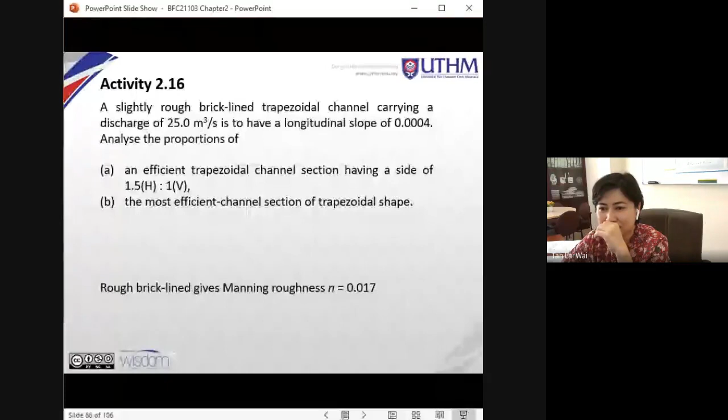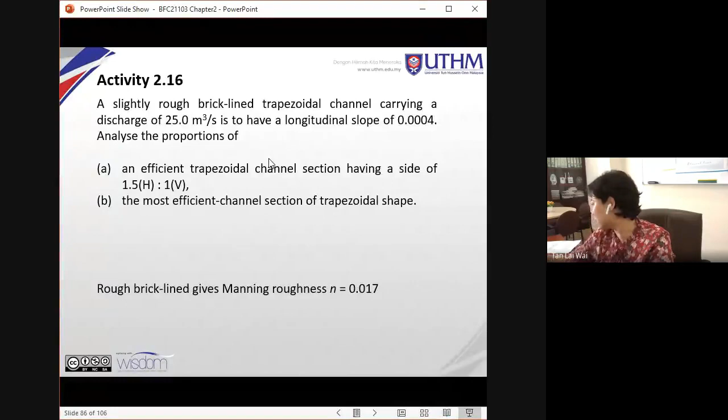Now you should be able to see one of the activities I asked you to try to attempt during your class session, the 1 hour class session. Now we have this activity 2.16. Just now I shared the notes of chapter 2 completed with the solution of all the activities basically. But I've renumbered the activities in your slides. I'm sharing the slide before I renumbered, but anyway the question remained the same, all right? Which comes with the solution, and then let's look at this activity.

We have this trapezoidal channel. The lining of the channel is rough brick lined. Rough brick, and then it is carrying discharge. Now this discharge, look at its unit, its unit is meter cube per second, so it's the uppercase Q, 25 meter cube per second, which is the discharge, right? Longitudinal slope, which is the channel slope, channel's bottom slope, 0.0004.

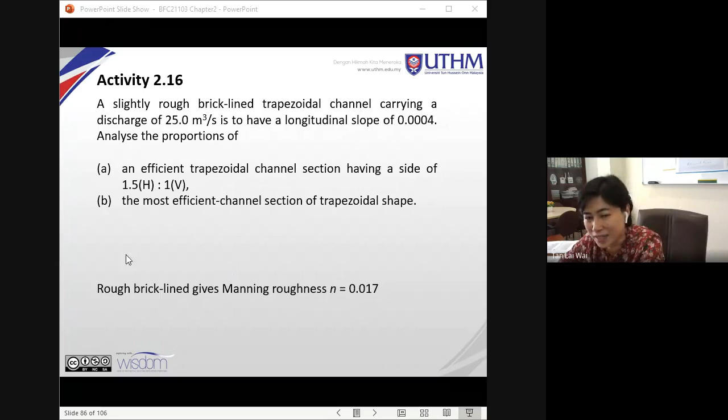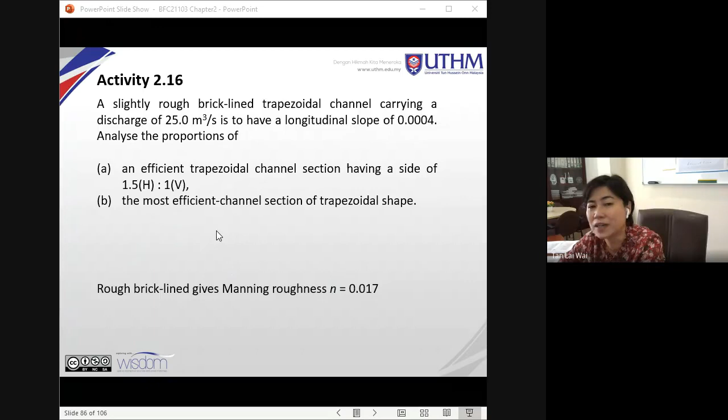All right, so now, rough brick lined channel, right? If you look at the Manning roughness coefficient table, you are going to get the Manning roughness to be 0.017. Normally we'll just give you the description, what you have to do is search for the Manning coefficient. Of course we are going to provide you with the table, so you don't have to search up and down basically.

Now let's look at the first part. The side slope is fixed, so 1.5. So for the best hydraulic section, we know that A equals to, you have y squared in bracket, 2 square root of 1 plus z squared minus z, okay? This would be your best flow area. And then we also know that the hydraulic radius R equals to y over 2, okay?

Of course you substitute, since you know z is already 1.5, you substitute. Alright, so you are going to get A, the expression of A in terms of y, because we have solved for z, so it's 2.106 y squared, to 4 significant figures. This would be 5 significant figures already, so you can write 2.106 y squared. Then of course, as I told you, the hydraulic radius will be half of y.

You can show that r equals y over 2, no matter what side slope is given for a trapezoidal channel, whether it's 1.5 or 1 over square root 3 or whatever side slope. You can show that the hydraulic radius is still the same, which is y over 2.

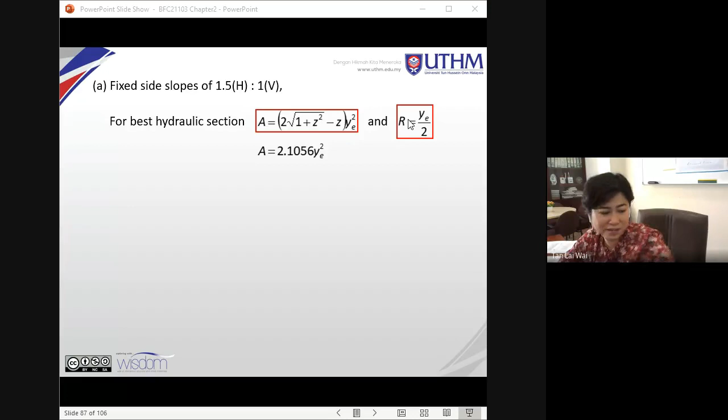Now for Manning, since the Manning roughness coefficient is provided, based on what you read from the table, based on the description of the channel's lining, we are going to use the Manning roughness flow equation.

Now the purpose here is you want to get the dimension. Basically, what would be the best dimension for the most hydraulically efficient channel. So what you have to find is the depth of flow so that you can determine the depth of the channel itself.

Once you know the depth of flow, then you can estimate the depth of channel. Of course it's going to be larger than your depth of flow, but you need to find the depth of flow. For a trapezoidal channel, you know that you need to have a side slope.

Now the side slope is given already, which is 1 to 1.5, and then you also need to determine the channel's bottom width. That would be it. You have the basic dimensions of the channel already.

So now to do that, your Q is provided, Manning's n you have found it, and the slope you have already given in the question. So the only unknown here is y, which you can solve for using the Manning equation.

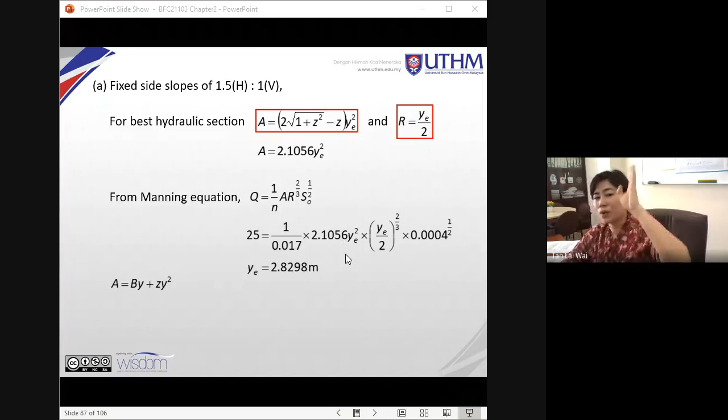That means the depth of flow in an efficient cross section will be 2.830 meters. Once you have y, you have z already. The final dimension you want to determine is the bottom width, b.

Using this equation, the only one you know, with a, y, and z, you can solve for b. Of course, here I want to solve for b. My A I know is 2.106 y squared.

I also can substitute, because I already found my y, I can substitute and solve for A. This expression here is just a rearrangement of A equals by plus zy squared.

How come the internet is not very good? Okay, I just rearranged, making b the subject of the equation.

So I have those, substitute the depth of flow. You should be able to find that your channel's bottom width will be 1.714 meters.

All right, now let's solve it. Okay, oh sorry, thank you. I think just now there's a disconnection of the internet, so thank you for pointing out.

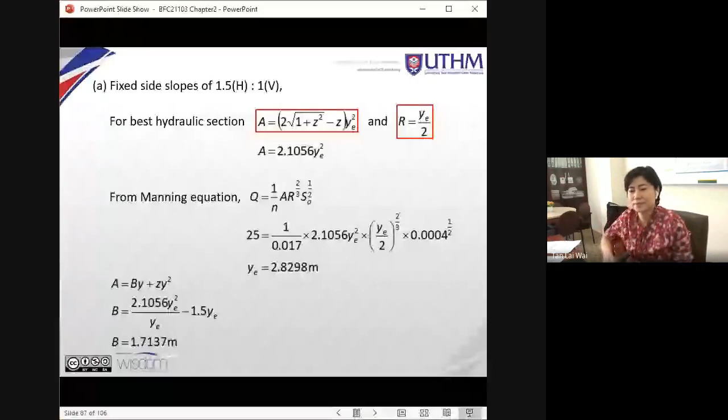So therefore, you should be able to find b equals 1.714 meters. That's it. Using your y, your b, and your z, you should be able to draw out the dimension already. So that is the basic dimension.

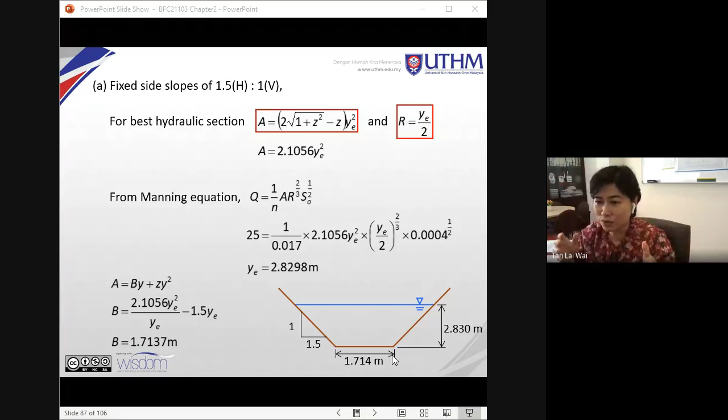You want to show that having such a flow area or such Q, discharge, this would be the best dimension section that gives minimum wetted perimeter and maximum Q. But of course the Q is constant in our case. So this will be your minimum wetted perimeter.

You can try many other dimensions having the same constant area, with the same Q, but you will find that this dimension will give you the minimum wetted perimeter.

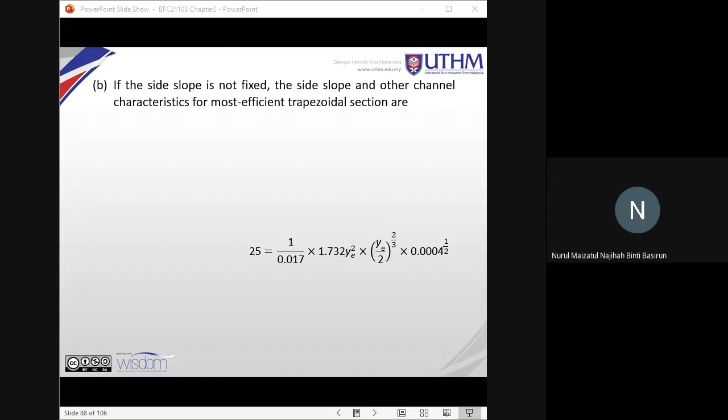Now, yes - if you get 1.715, is that okay? 1.715, right? Yes, correct. Okay, because you probably used A equals 2.106, right?

Okay, thank you. If you miss by up to 2 decimal points or things like that, it doesn't matter, right? You'll still get full marks. No worry. Now, second part B.

For part B, the side slope is not given, so you know we have to go through the analysis. The most efficient side slope is 1 over square root 3. Substitute this into your formula, remember the table of best hydraulic sections. For trapezoidal, you extract all those formulas: A equals square root 3 y squared, because when you substitute z equals 1 over square root 3 in this formula, you get 3 over square root 3 y squared.

Now solving it, as r remains the same, the table also provides hydraulic radius equal to half of y. In Manning's equation you substitute a, but since y is unknown, you need to find y. Substitute the known values to find y, rewriting this in terms of the section factor. That means you put AR to the power of 2/3 as the subject of the equation, then you can find your y. Solving it, you get y equals 3.045.

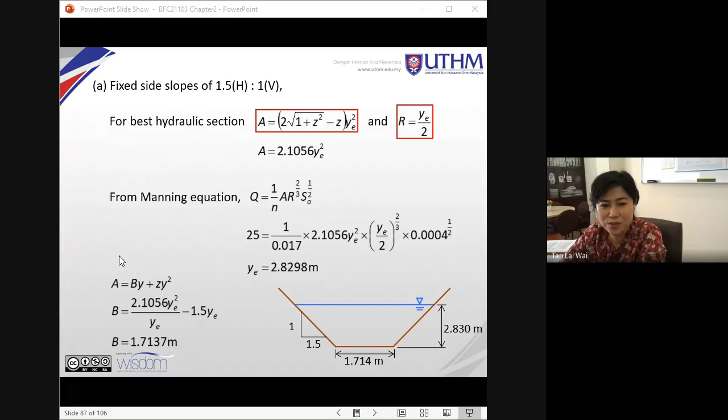So you have found z as 0.5774, no unit for z, and you have found your y. The third dimension you need to find is the bottom width, which is equal to 2 over square root 3 times y. Where did you get it from? From that table. If you don't believe me, substitute your z and your A in this equation, and you'll get your b equals 2 over square root 3 times y.

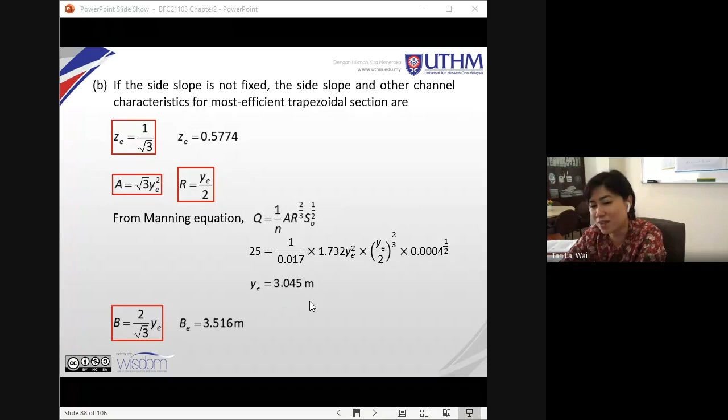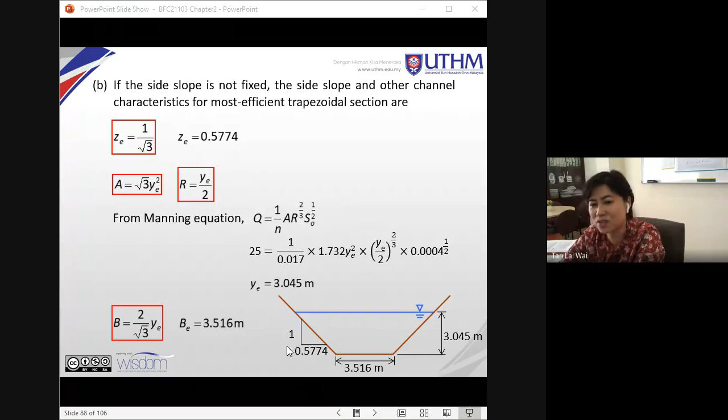When z is equal to 1 over square root 3, then substitute y. You already found that y is 3.045 meters. Therefore, your channel's bottom width would be 3.516 meters. So this is with side slope 1 to 1 over square root 3, which is 0.5774. That's it.

Now, this activity 2.17 is actually similar, so I'm not going to repeat my explanation, it's similar to the previous activity. However, I just wanted to show that the channel lining here uses gravelly earth trapezoidal channel.

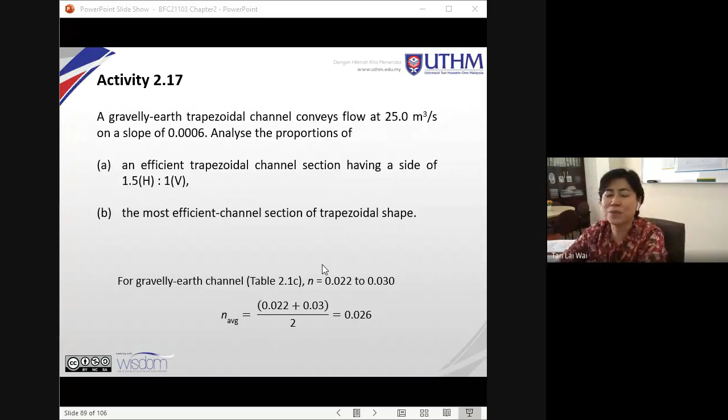I just need to go to the Manning table to check. Here, gravelly earth. If you look here, gravelly earth is actually between the third one, earth straight and uniform, and gravel. So it's between 0.022 to 0.03.

I think I've explained this before. You have a minimum range and a maximum range, so which Manning n should you use? Well, to make life easier, you can use the average. That means 0.022 plus 0.03, add them together, divided by 2, so you get an average n.

Or if you go to see the site itself and say it's not that clean, you can increase your n to 0.03, or if it's really clean, you can use a smaller n. Now, to make life easier in analysis since we cannot go to the site, we can just take the average. But if you ask me, is it wrong to take 0.022, or is it wrong to take 0.03? No, it's not wrong, you still get full marks, so it doesn't matter.

But my advice is, actually for me, to mark your solution easily, you can just take the average. But I don't mind if you want to use 0.022 or 0.03, that's also correct. So this is the average, I get 0.026. You can repeat the same procedure as before for solving A and B basically. So I have the solution here, you can check it out, try it yourself.

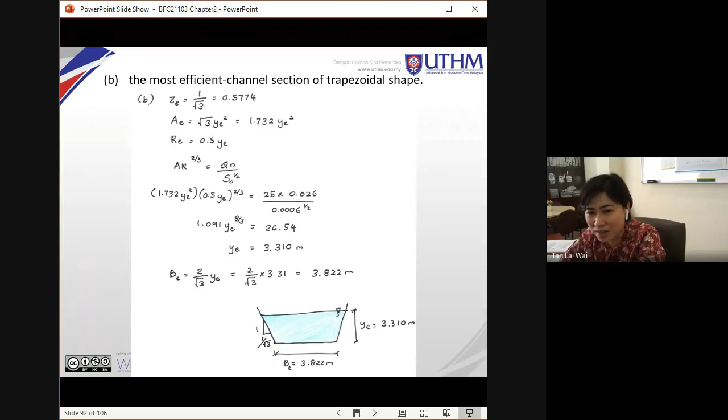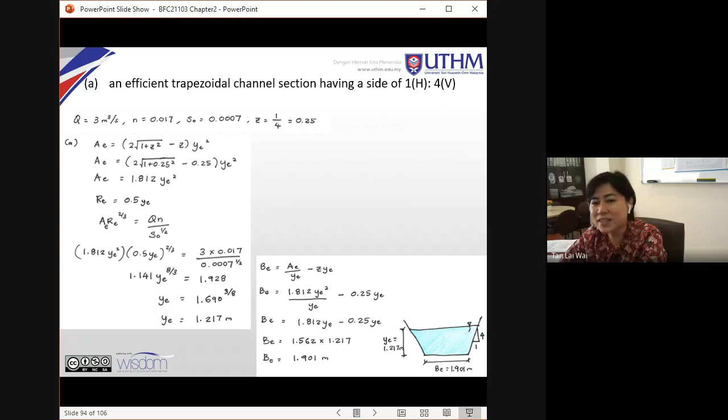Before you check out, I already shared this solution earlier, a few minutes ago. Same thing here, I just give you more exercises for you to practice on. You have the solution, so it's easier.

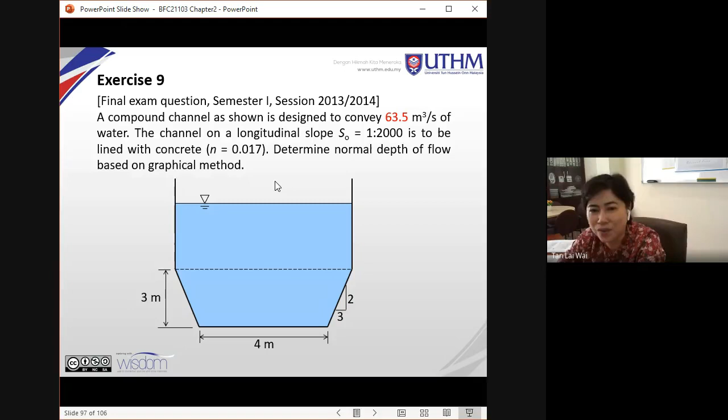Now, exercise 9. We'll come back to this. I think you have learned this before, right? In the previous activity, the solution is there, because I want to go straight to this topic here.

We have a compound section. We've already looked at a couple of compound sections, channel sections. Now, in reality, if you look at that diagram, the channel is not as nice as this, or even this. It is always irregular in shape, and between sections it also has different width, basically it's non-uniform. The right word is non-prismatic in reality.

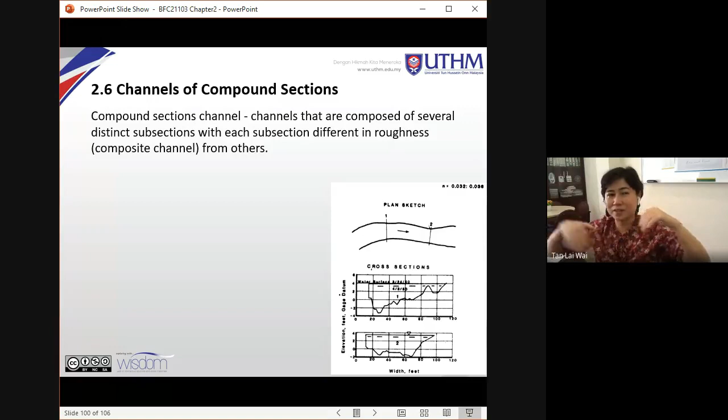However, in analysis, we tend to use a simplified section. So even between sections, or even between sides of the same section, both sides and the bottom can have different roughness. Channel roughness, be it Chezy or Manning, it doesn't matter. It has different values, so in that case you need to find velocity depending on various roughness.

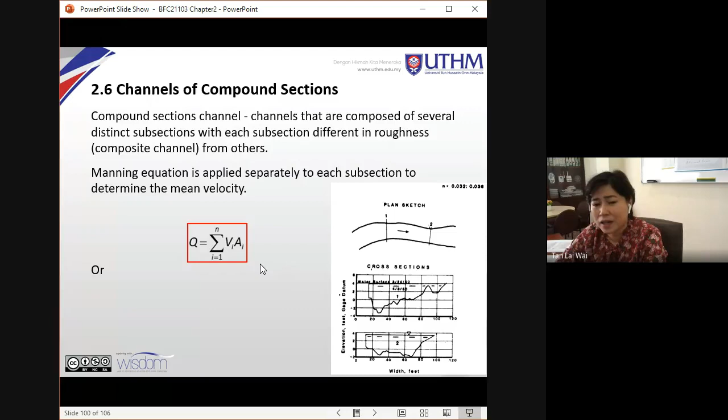You could use this formula here, where V equals K. What is K? Do you still remember? It's the conveyance factor, Q over S naught to the power of half, and it's of course equal to 1 over n and so on.

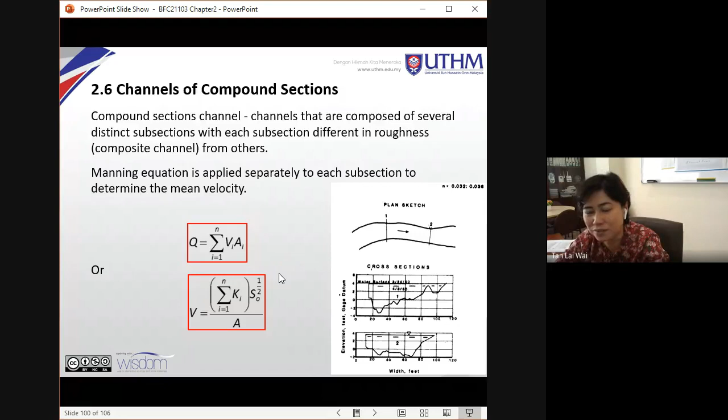Now you can use this formula here to compensate, since you have different K depending on your Manning roughness coefficient, so you can solve for velocity. I don't have exercises here, this is just for your knowledge. Probably in Ven Te Chow's book that I shared, there are quite a number of exercises if you want to try.

We have another activity that shows the cross section of a river, and you were asked to find the discharge. This is a compound section. You can divide it into 3 or 4 subsections, it doesn't matter how many you divide it into, it will come to the same answer, using the formula that we have learned before.

As I told you, for compound sections there are a couple of methods. Some reference books or internet resources you find will give you a slightly different method. The method I show is: find total A divided by total P to get your hydraulic radius R. That's one, quite simple method to find the hydraulic radius for a compound section.

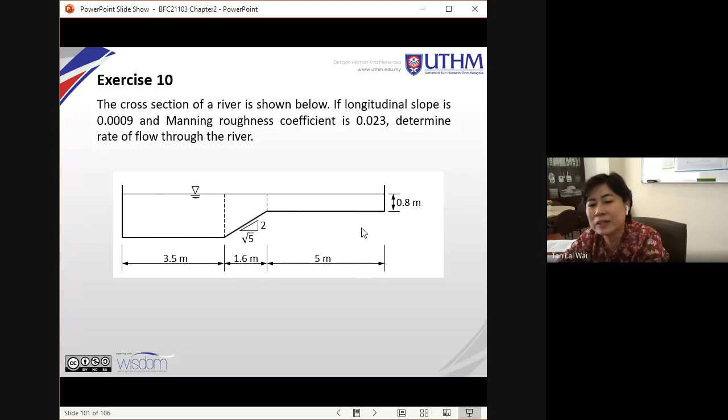In our syllabus we will just use that, because whatever section you divide it into, you are going to get the same hydraulic radius, no matter how many subsections. Now I have solved this, you may take a look at it. We have already solved this kind of exercise previously, this is just a refresher course, refresher exercises, additional exercises to improve your understanding.

Now in this case, if you look at the Manning roughness coefficient, you have various Manning roughness values. Remember the formula we just used? If you look at here for varying n, just a second, let me enlarge the slide.

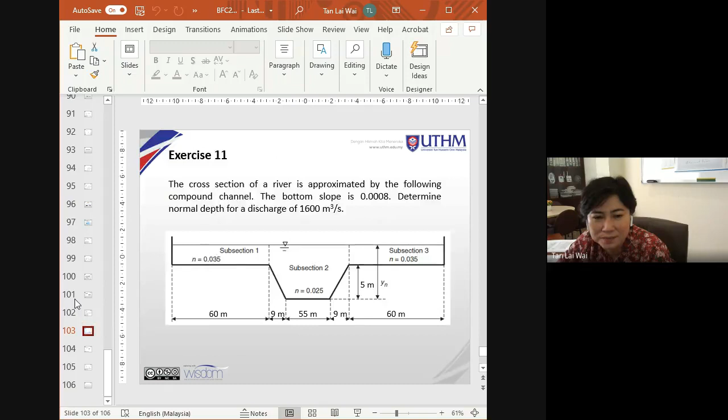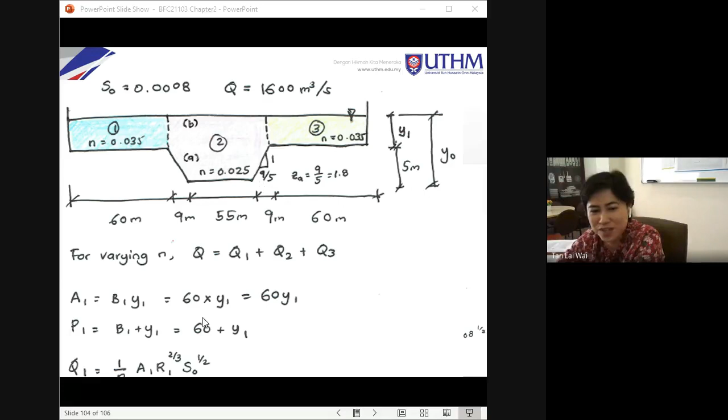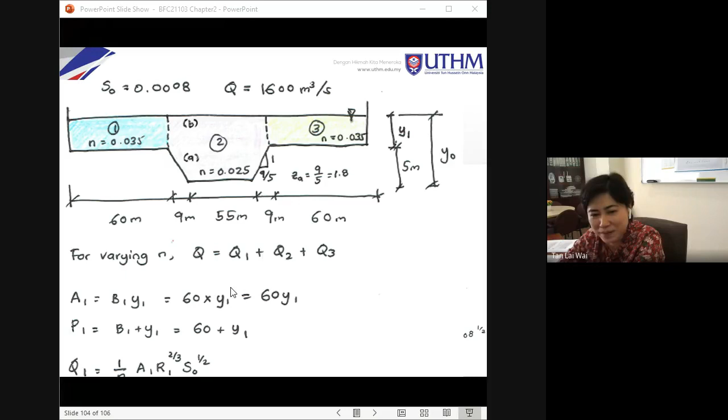If you look at here for varying n, the simplest way to do this would be: I could find for sections 1, 2, and 3. They have different Manning values, so I could solve for Q1, Q2, and Q3 separately, then add them. So first solve for Q1 - remember the wetted perimeter is just y plus b, or b plus y, it doesn't matter, and A is still b times y.

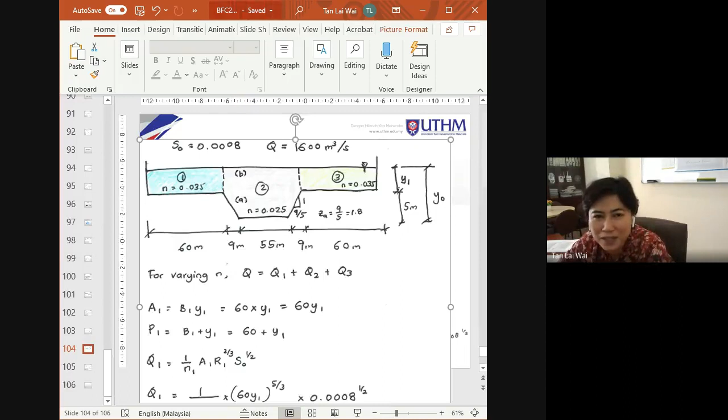So you have that, you can solve for Q. You just substitute 1 over n, AR to the power of 2/3. Let me go back a bit - undo, go back, and then...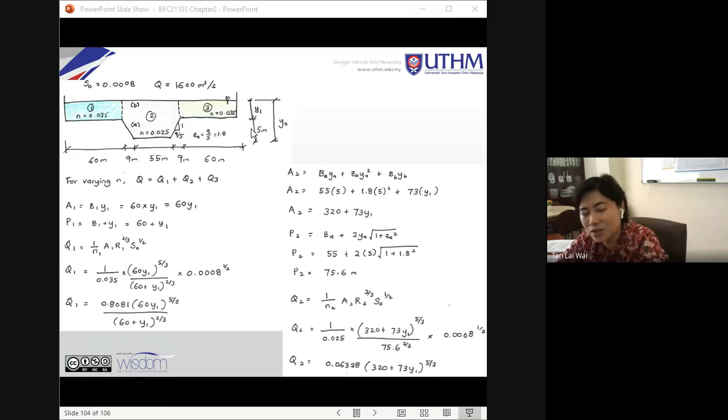Okay, then you solve for subsection 2, and then you have subsection 3 as well. Solving it, you can add them up together, and then you are going to get your total Q. Total Q is in terms of Y, because Y is not provided here.

Okay, you need to find YN. I didn't read the question properly. Okay, now determine normal depth for a discharge of 1600 meter cube per second.

So you are going to solve for Y, meaning your discharge Q is all written in terms of Y. You have YN here. Now you can actually solve for the trapezoidal section at the bottom here, because it's 5 meter, and of course your YN is more than 5 meter, right? So you could tentatively put

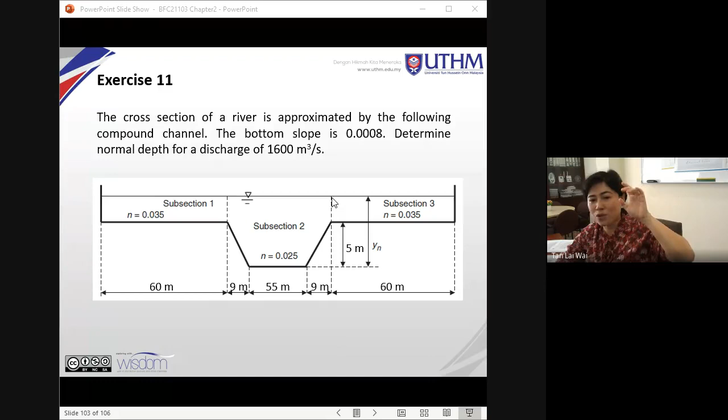a number or a symbol, for example Y1, to represent the remaining of YN minus 5 meter. If you look at this side, the diagram, I assume the remaining of Y0 minus 5 meter is Y1. So all my Q actually is expressed in terms of Y1, if you look at that. If you look at the solution, it's Y1. Therefore, I can actually solve for Y1.

Now, my YN or Y0 is actually 5 plus Y1. So therefore, it's 6.286 meter. Try it out.

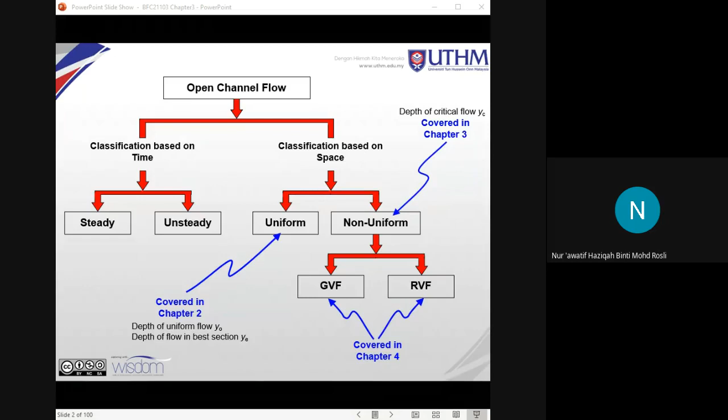Thank you. Okay. Remember that when we look at this slide here, unsteady, steady is based on classification of time. Non-uniform and uniform is based on classification based on how it changes with space, right?

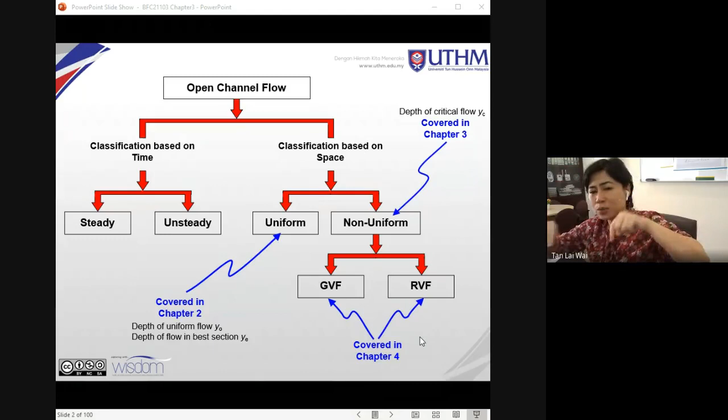Now, as I told you, there's a simple way to remember. The word 'steady, unsteady' has a T in it. So whether the depth of flow changes with time or not is actually whether it's steady or unsteady flow.

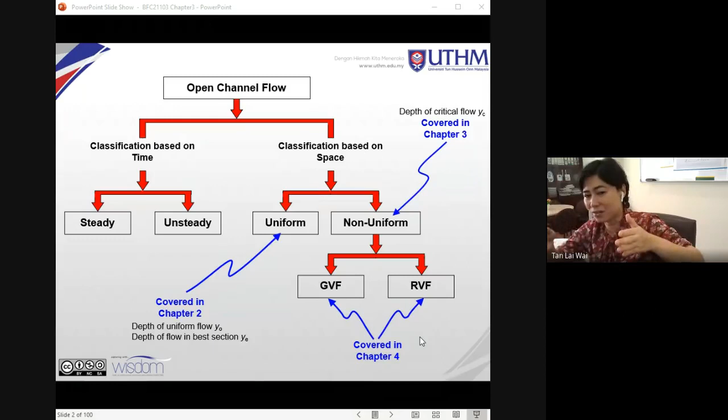For uniform, it's whether the depth of flow changes. When I say depth of flow, automatically it refers also to velocity of flow, because when the depth of flow changes, the velocity changes as well. This is using the mass conservation concept where Q equals AV. When the depth changes, velocity changes as well. So I'm just using one parameter, which is the depth of flow, to determine uniform or non-uniform.

For uniform flow, the depth of flow stays constant throughout the channel length, and for non-uniform, it changes along the channel. For non-uniform flow, we are going to look at gradually varied flow and rapidly varied flow in chapter 4.

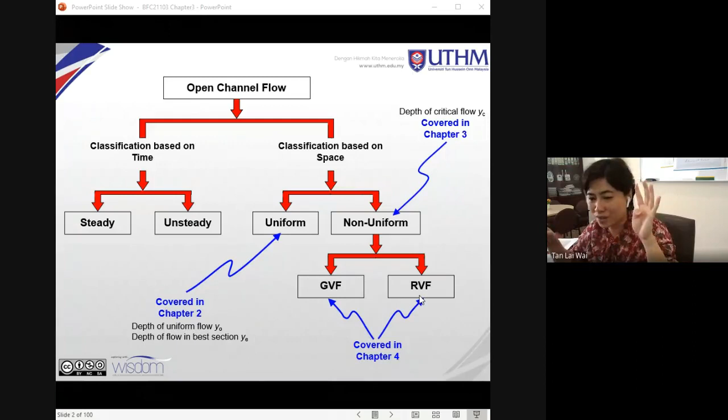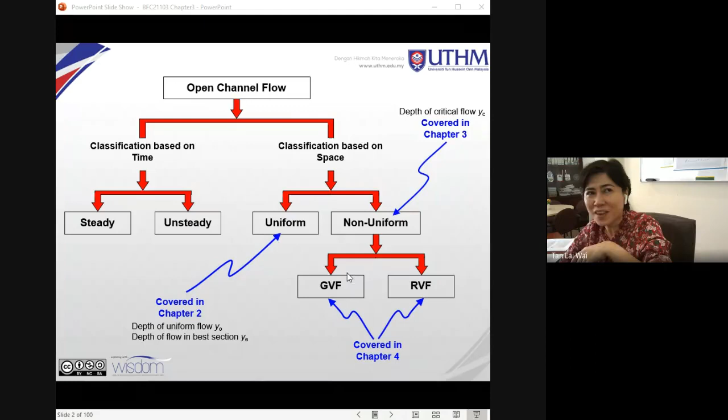So in chapter 3, we are going to look at depth of critical flow. Actually, we are going to look at the specific energy equation. I think this is what we are going to look at. We also are going to look at cases of what happens to the depth of flow when the flow goes over a broad-crested weir, and when the flow goes through a constriction.

If there's a channel where the width reduces or is constricted, what happens to the depth of flow? Of course, it will change as well. So there will be various conditions depending on the width of the constriction as well as the height of the broad-crested weir. This is an interesting topic.

So, concept of specific energy. What is specific energy? Specific energy is actually measured from the channel's bottom.

Last time when we learned about Bernoulli's theorem, we had 3 terms: the velocity term, the pressure term, and the potential term, depending on the height. But in this case, since specific energy is measured from the channel's bottom, you don't use the Z term, the potential term measured from that. So you only have 2 terms: the depth of flow and the velocity head, both in meter units. So E is in meter as well, specific energy is in meter.

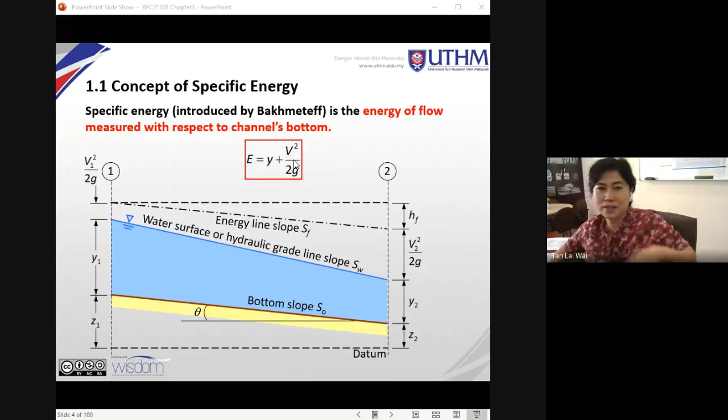Alright, so now this E equals to... let's see. This E equals to y plus v squared over 2g, right? Let me rewrite this. Betul? Tak nampak? Oh sorry. Okay.

If it's too small, okay, I'm going to stop presenting this and present the whole screen instead. But sorry, I'm actually purchasing a camera that does not autofocus -- this autofocus keeps refocusing and I don't know how to turn it off. This is so much better.

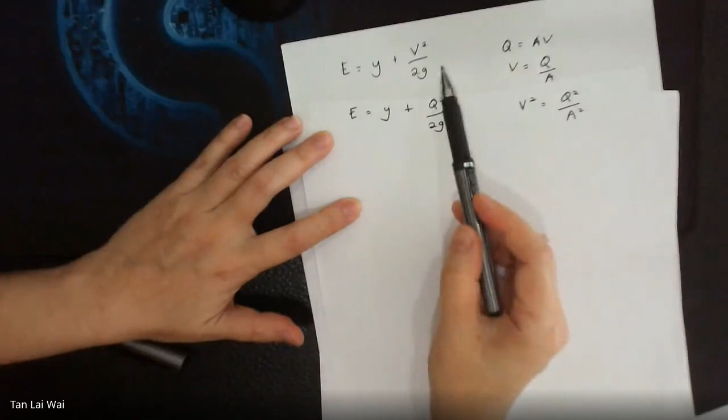You have this specific energy, E equals y plus v squared over 2g. You can rewrite this because we know that Q equals AV. Rewriting this by making V the subject of the equation, we have V equals Q over A. So I could rewrite the equation: E equals Y plus, since V squared is Q squared over A squared when I square both sides, Q squared over 2g A squared. So I could use any one of these equations depending on what data I have to solve a certain problem.

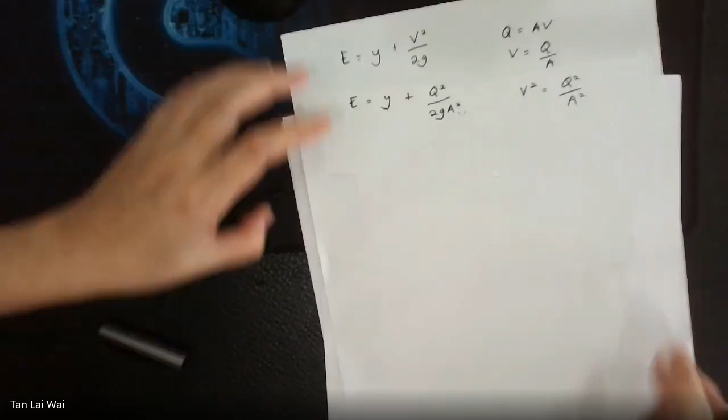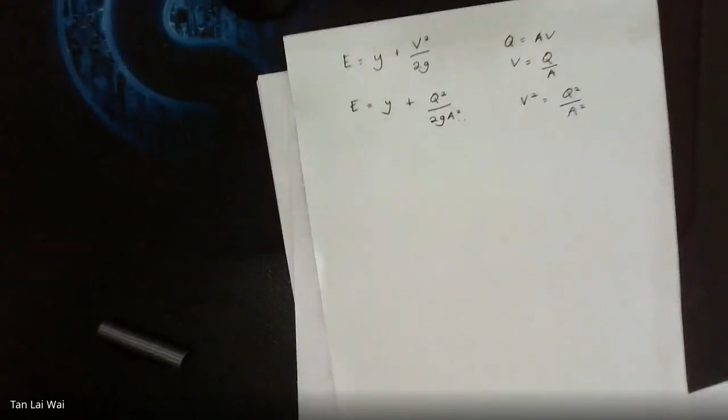Now I have this. What if -- we have learned in chapter 2 about this. Now in chapter 2, we also learned about this for rectangular channel. This is only for rectangular channel.

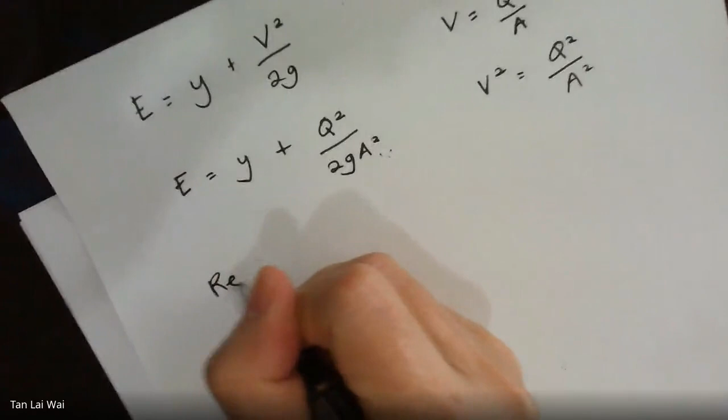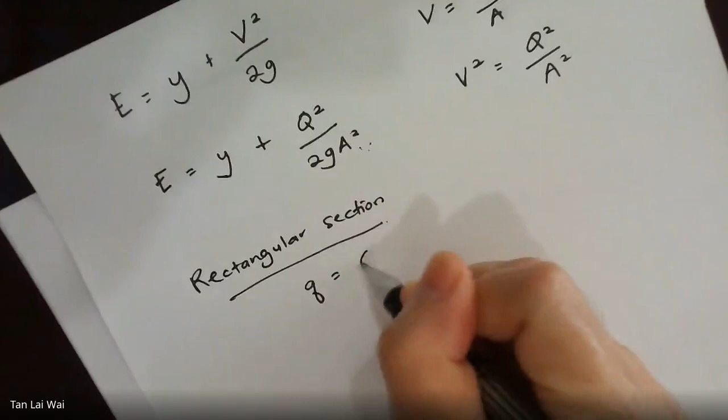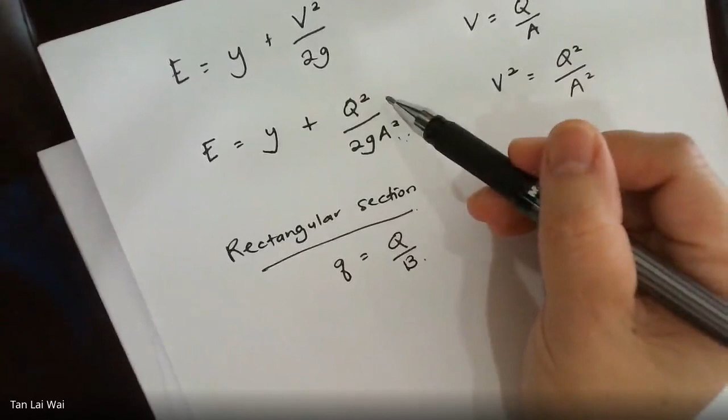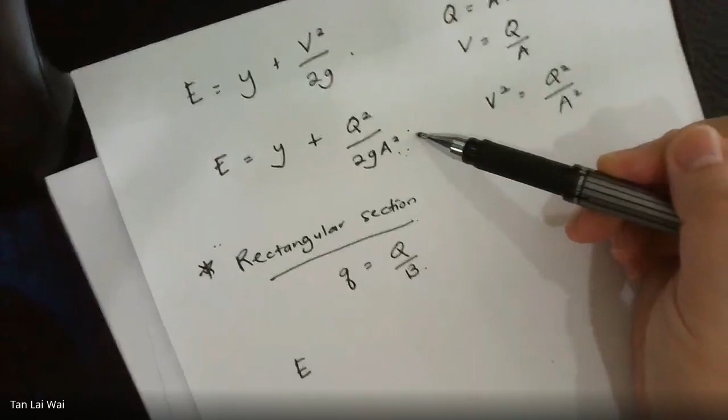We also learned about discharge per unit width. Now, if I'm going to divide my Q, I'm going to have this expression. This is only applicable for rectangular section. I can further this equation, and this specific energy equation applies to all sections, including rectangular. That means I can use this equation to solve for rectangular, triangular, trapezoidal, or circular section.

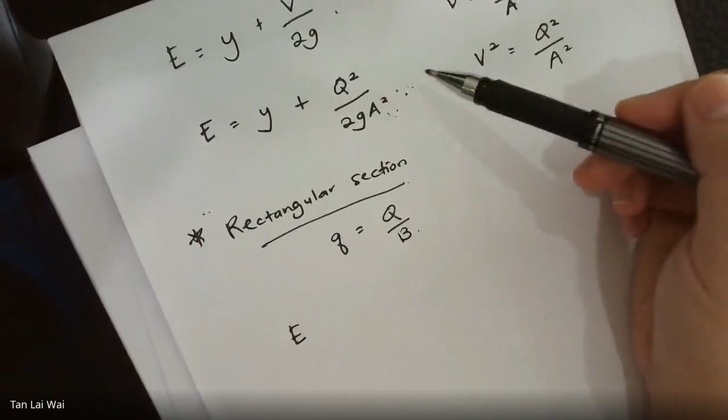Now, mainly for rectangular section, I can actually simplify this equation, because I know that I could use discharge per unit width. So I can simplify this in case there is a question that doesn't give you discharge but gives you discharge per unit width.

So if this discharge per unit width is given, I'm going to divide this by b squared over b squared, dividing top and bottom by b squared. But you know that this is 1 as well, right? So I'm going to have q divided by b, this becomes q squared over 2gy squared. This equation here only applies for rectangular section.

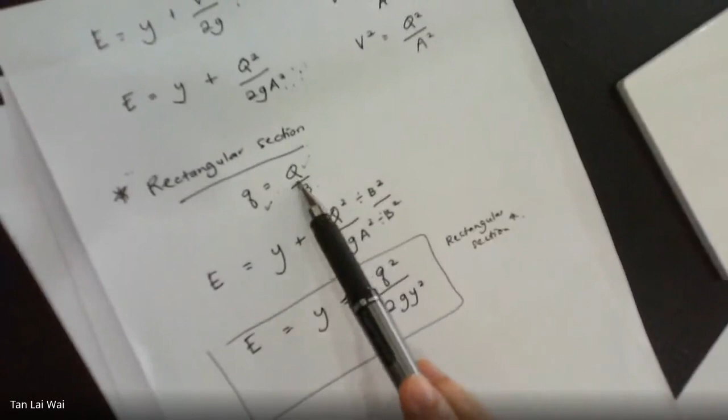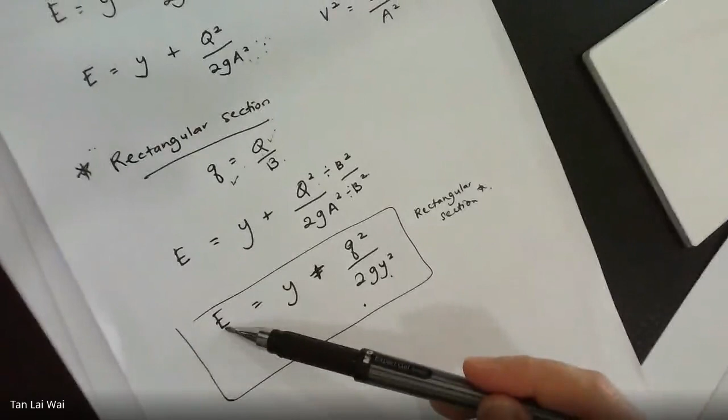Now, if the question gives you, for rectangular section, the discharge, can you use this? Yes. If I have the width of a channel, I could actually simplify by getting my discharge per unit width, and I could just straight away use my width. I don't have to find my A to find specific energy. I hope you are clear on this.

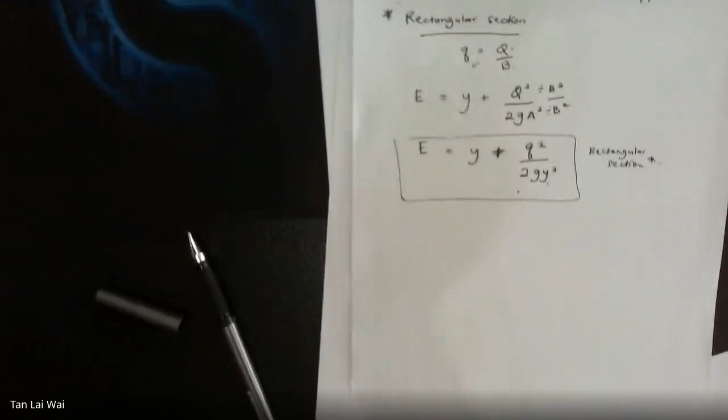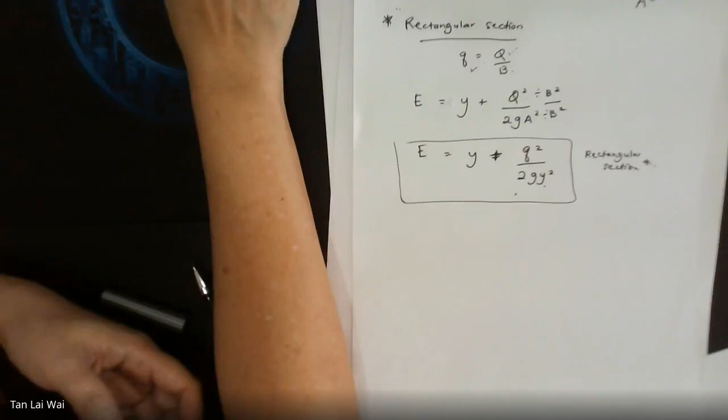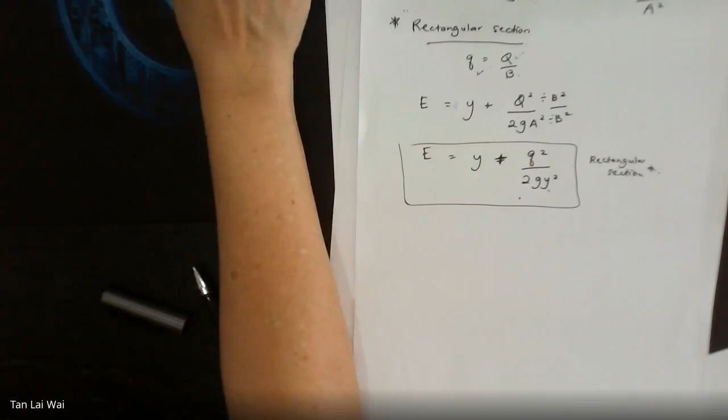All right, let's go back. I'm going to switch this. I didn't present the whole screen, but it's okay. All right, allow. Okay, present now. A window. Chapter 3. Okay, let's go back. Okay, now let's go back to

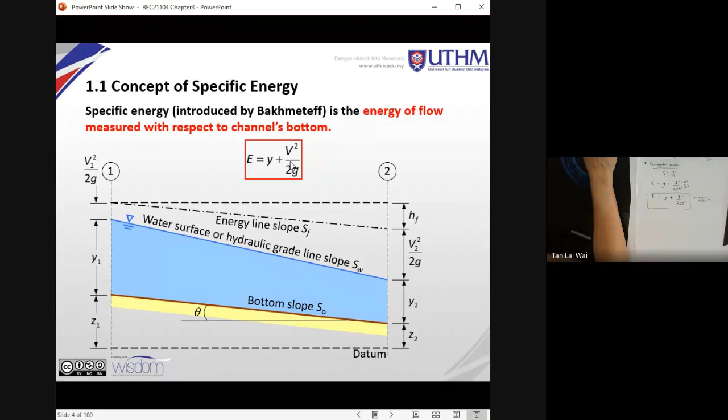Our slides. Okay, so if you look at this expression here, the specific energy, I could rewrite it as E equals Y plus Q squared over 2GA squared. You have seen that, right? And then now what does it mean? This equation here, E equals Y plus Q squared over 2GA squared, I can actually plot out.

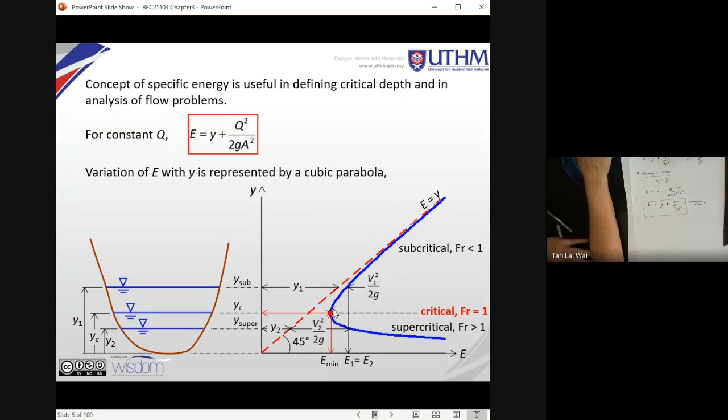Okay, now let's, I'm going to show you, just a second, I'm going to switch this back. Let's see. I'm going to show you the E-Y relationship on an Excel. Now, let's look at our Excel. Bear with me, we only have another 10 minutes to go. Alright.

You should be able to look at the Excel file right now? Yes, Doctor. Alright, thank you. Now, let's imagine we have a rectangular channel. This applies actually to all sections, it doesn't matter rectangular or triangular or trapezoidal, but we'll just use a rectangular section, which is easier to compute.

Having the discharge, a constant discharge Q of 20 meter cube per second, the width of the rectangular channel is 2 meters. The width, it doesn't matter top width or bottom width, rectangular is the same. So the depth of flow, let's say, is 0.5 meter. So my A here is B times Y, I'll get my A, which is the flow area.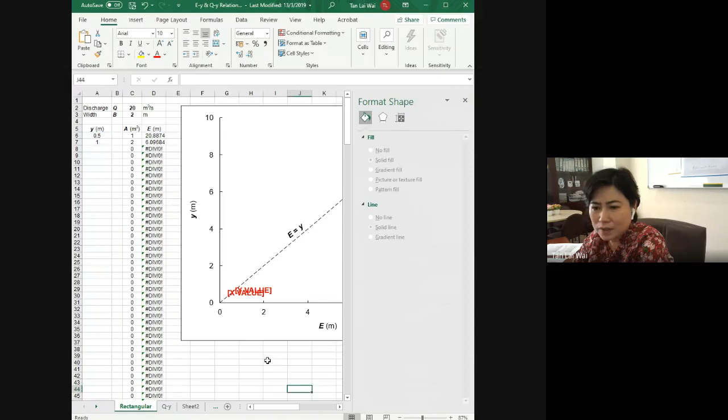Data series, okay, I'm going to have built-in circle... option. Then I'm going to have the point there. If you look at it, right? I thought I picked circle, but it's okay.

Now, that would be when depth is, if you look at here, the depth y on the y-axis is 1 meter. Okay, another thing, I don't mind if you want to plot your y on the y-axis and your e on the x-axis, you want to switch it up, doesn't matter, but you have to understand, if you switch it up, the shape is a bit different, okay, basically.

Now, there's this dashed line, e equals to y. What does it mean? E equals to y means, at this point here along the dashed line, right? Your e, when e is 2, your y is 2. When e is 4, your y is 4. That means e equals to y line, basically. It doesn't matter, if your e is 3, your y will be 3 as well. So this dashed line e equals to y says that is the point where your value e equals to y.

Okay, so I draw a dashed line. You are going to see that your specific energy line would not cross that dashed line e equals to y. What does it mean? Okay, you see your equation, right? E equals to y plus q squared over 2ga squared, right? It says that your e is always greater than your y because you have y plus another term which is q squared over 2ga squared, right? So therefore it would not cross your y, dashed line, the e equals to y.

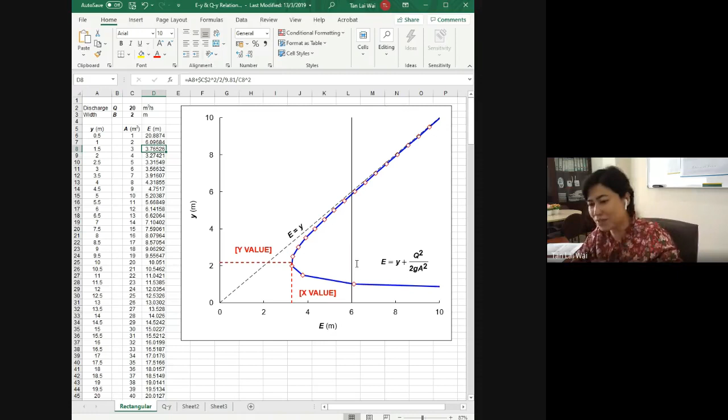So if you look at that, if I increase it, this line is actually plotted from my E equals to, that means my specific energy equation. So you are going to have that line having the same Q, the same B, but you have changes in Y. Now it comes to a point where you are going to get E, a minimum E, before it switches, right. That means your E is going to, initially your E reduces, right, as your Y increases. Then when your y further increases, your e will increase again.

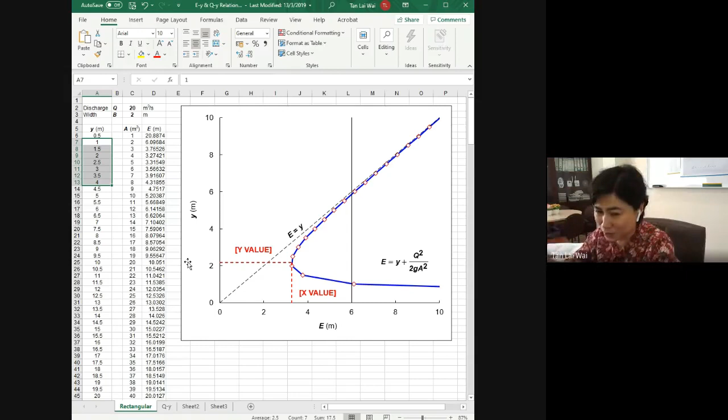Okay, and your line of E, specific energy line, is actually going asymptote with your E equals to y line. Asymptote means it's not going to cross, but it's going near. Alright, now this E minimum, we term it as minimum E. And what correspondent, which y correspondent when E is minimum, is actually YC, the critical depth. Alright, we could show actually critical flow occurs when E is minimum. We have those in slides. Alright, so I hope you understand the expression there and the equation.

Let's go back to our slide. And I hope you understand this EY curve, let me tell you this. It is important for you to be able to draw this EY curve. At least sketch it, not really like draw it in high degree of accuracy, but sketch it, right?

And you know how does this line come, because as Y changes, right, having the same Q, right, you are going to get one line, the blue line, right? Because as Y changes, E initially it will decrease, then it will increase. Now, what differentiates, you know, you have, as I told you, you have a point where E is the minimum, and the Y corresponding to the E minimum is the critical depth of flow.

Now, when Y is less than your critical depth of flow, it is actually the depth of supercritical flow, YC. If you look at here, right, when flow is supercritical, all right, when Y increases, your specific energy reduces. For subcritical flow, when depth of flow increases, your specific energy increases. All right, so I hope you understand. The depth when Y is below, less than YC, it is actually the depth of flow of supercritical flow. When the depth, that means, you know, the depth along this blue line here, all right, is above critical depth of flow, it is actually the depth of subcritical flow.

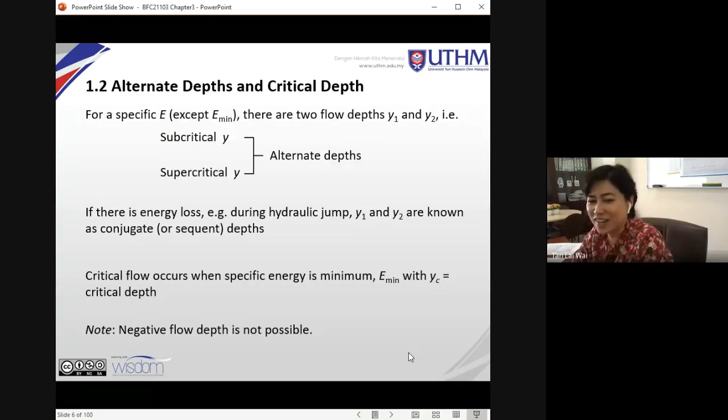So that means there's something wrong with your calculation. Negative depth is not possible. Okay, now you have this specific energy equation. We want to prove that when E is E minimum, or when critical depth occurs, Froude number is equal to 1. Let's prove it.

Let's see, you differentiate E because you want to get E min. So dE/dy equals 0 to get E min. So differentiate your specific energy equation with respect to y. You have 1 minus... now A consists of y, so you are going to do partial differentiation. So you have q squared.

Q is constant, G is constant. We've already mentioned it, so you have q squared over G. You differentiate A, and you are going to have A to the cubic power, but with negative 2. Divided by 2, you cancel the 2.

So differentiate again A, because in this case A is not constant, so you have dA over dy. No matter what A's expression is, you are going to differentiate it again, dA over dy. So at minimum specific energy, we normally use Y as Yc - critical flow. Later on we are going to show that it is critical flow, and A is Ac. So therefore, equating dE over dy, because we said E is minimum, we are going to show that Y is equal to Yc.

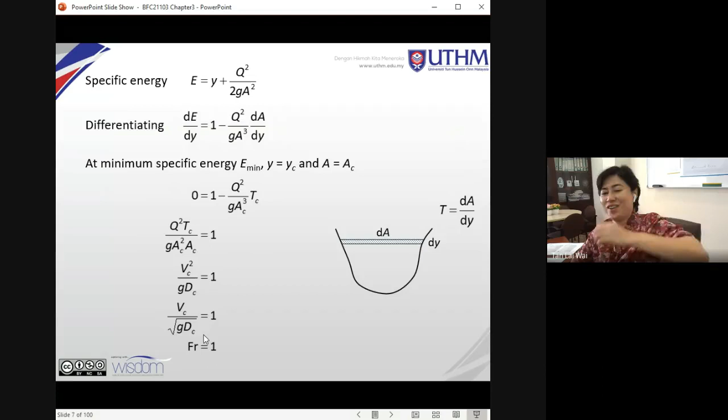So square root both sides. I'm going to have V over square root of GD becomes 1. So it shows that when E is minimum, your Froude number becomes 1, or it is critical flow. So Y is YC basically.

So this is another specific energy flow in rectangular section. Same thing - since it's a rectangular section, we are using this simplified rectangular section formula I've shown you just now. So rewrite it, we want to show Q is maximum. When it's critical, so we are going to differentiate Q with respect to Y as well. This is the variation.

I actually have the Excel of it, but I hope you understand that when Y changes, this is what your Q becomes. There is a switching point here, where you get Q maximum, basically, and then it comes back. It's actually going upwards. Now, these are known as conjugate depths.

When you analyze hydraulic jump and things like that, you are going to use this specific energy, in terms of Q and Y. Now remember, if we use discharge over unit width, this is actually normally for rectangular section, because your trapezoidal section has different top width and bottom width, so it's not regular. So discharge over unit width only applies for rectangular section.

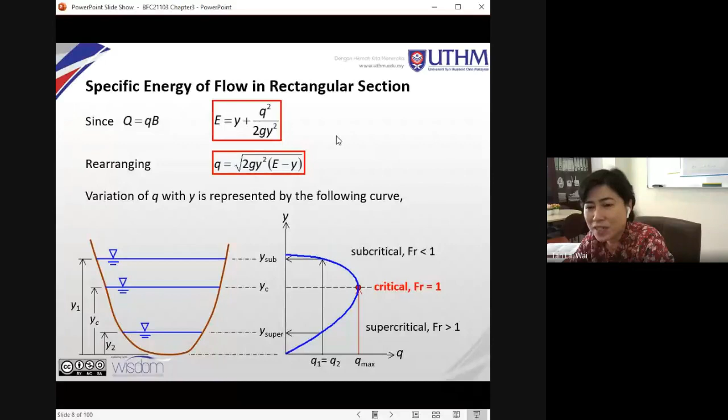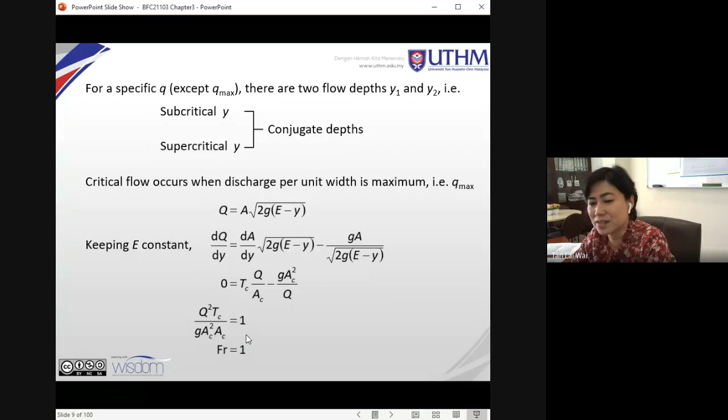Okay, now you differentiate dq over dy. So we are going to show that it is still critical flow. I'm going to go to another slide, then we are done for the day.

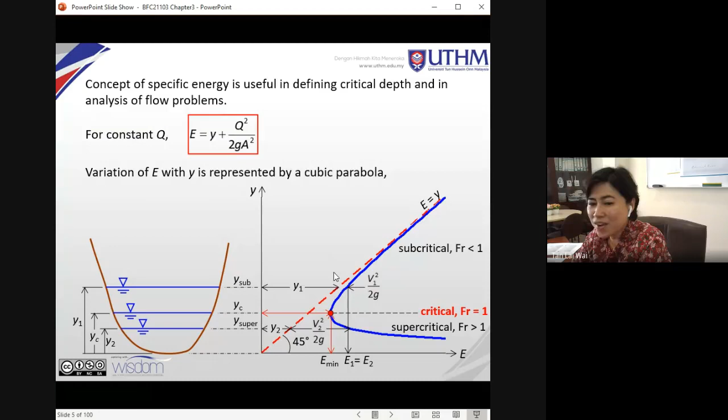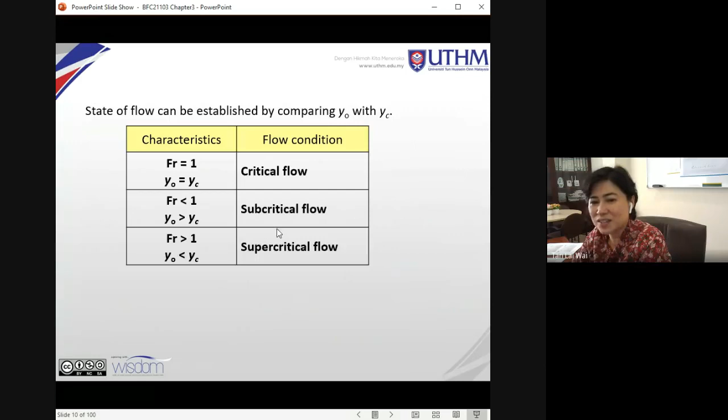Now, state of flow can be established by comparing Y0 with YC. We have looked at this already - we compared that when Y is less than YC, it is supercritical flow, and when Y is greater than YC, it is subcritical flow. So you can summarize: when Y greater than YC, subcritical; Y less than YC, supercritical. Of course, supercritical flow means Froude number greater than 1.

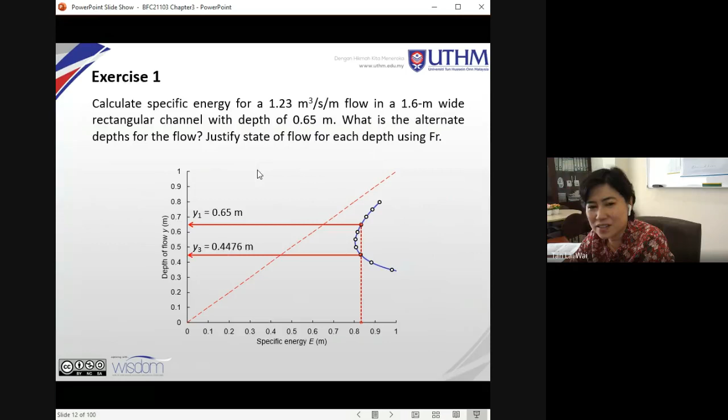So try out activity 3.1 yourself. You have the solution there, but try and calculate it. Who knows, maybe there's some mistake in my calculations - you may check for me as well. Try all this. I think you can go. I'm not giving you the solution... I don't think so, I give you the solution there, but try it out. Then we'll continue.